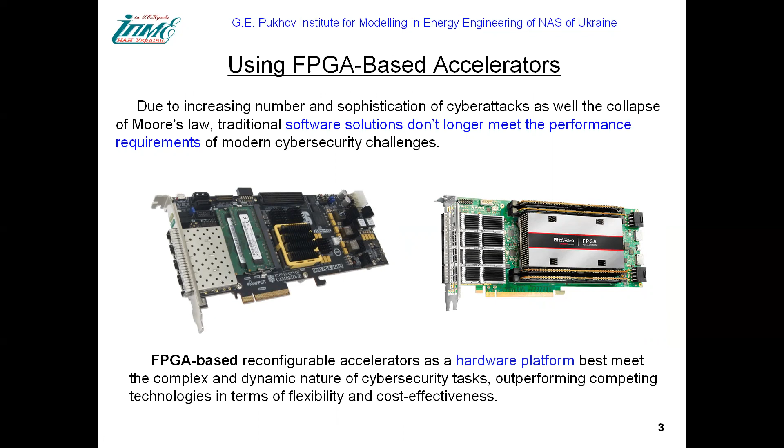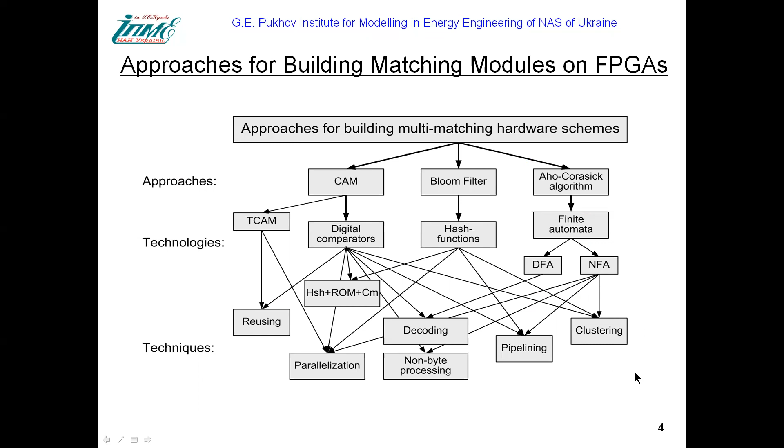There are a huge number of technical solutions to build hardware matching schemes. A lot of approaches based on different technologies, modifications, techniques, tricks. It is not a trivial task to choose the optimal solution for certain conditions.

Earlier, in our previous work, a method for fast quantitative evaluation of technical characteristics of such systems and their components was proposed. It is based on the so-called estimation function and allows to predict hardware costs and performance of a given matching scheme and a given pattern set to be recognized.

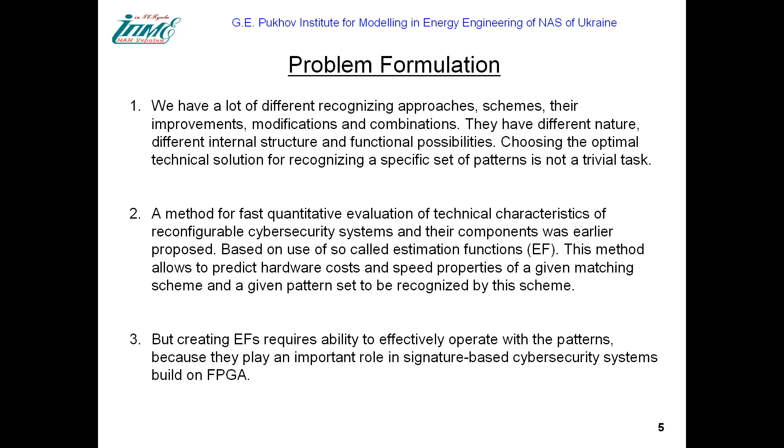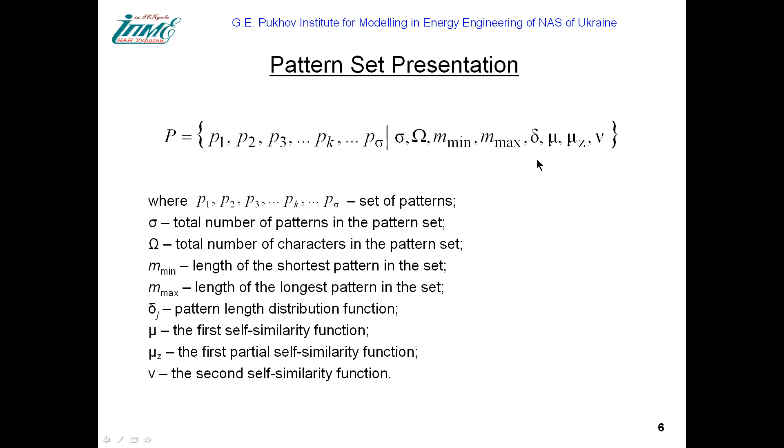When creating the estimation function, it is very important to be able to effectively handle the patterns. We propose to present the pattern set in such a way, namely a set of patterns and a set of their properties. The following pattern ordering technique is also proposed.

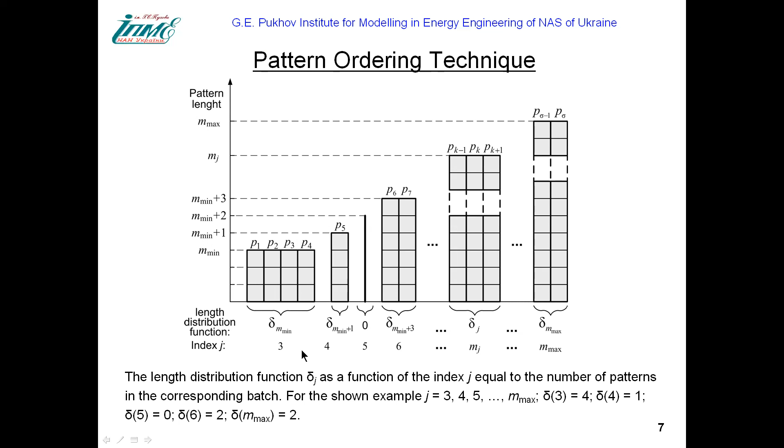Let us sort the patterns in a set by their length and distinguish groups or batches of patterns having the same length. Let us define the distribution function as the number of patterns in the corresponding batch. The proposed technique allows to easily find such values as the total number of characters in the pattern set, the total number of batches,

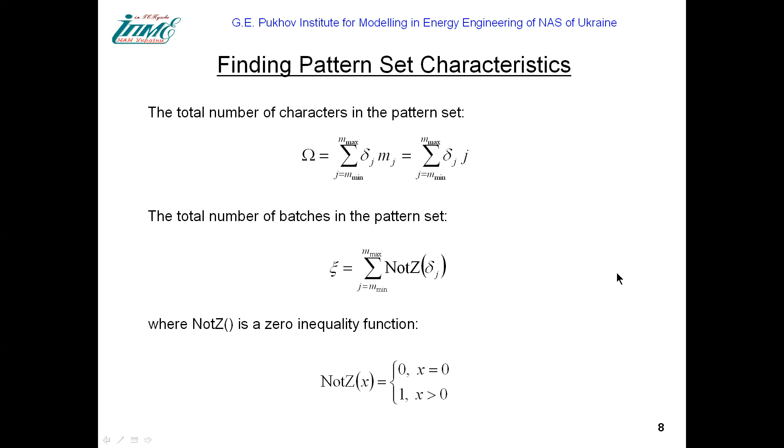and so on. Let us consider the estimation function for the hardware costs of the basic CAM, basic content addressable memory scheme. As we can see, this expression depends on the given pattern set P, as well as on the properties of the FPGA

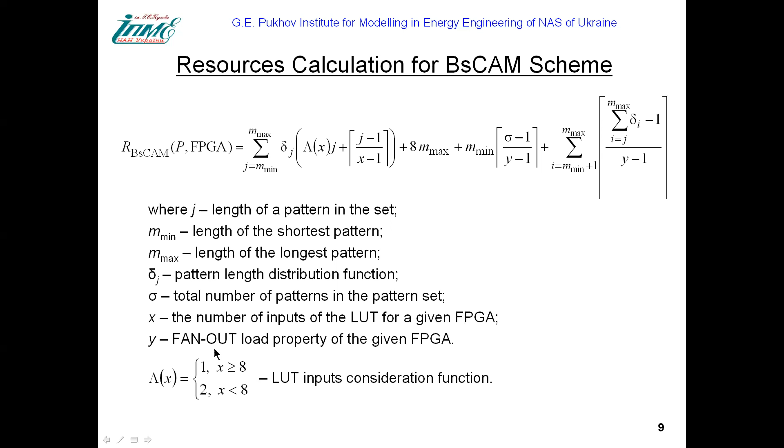device given. The pattern set properties are the length of the shortest pattern, the length of the longest pattern, pattern length distribution function, total number of patterns. The FPGA properties are the number of inputs of the LUT for a given FPGA and the fan-out load property of the given FPGA.

Let us test the proposed pattern set formalization with help of the parallel combining method. The essence of this method is to join together several different matching schemes and distribute the pattern set to be recognized between them in order to maximize the advantages of every matching approach.

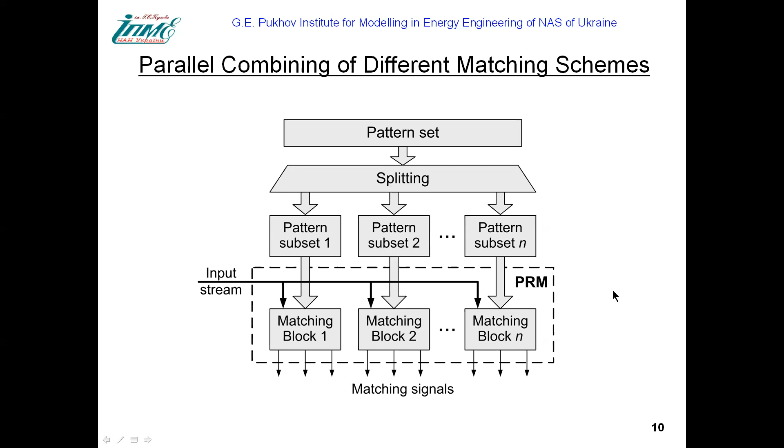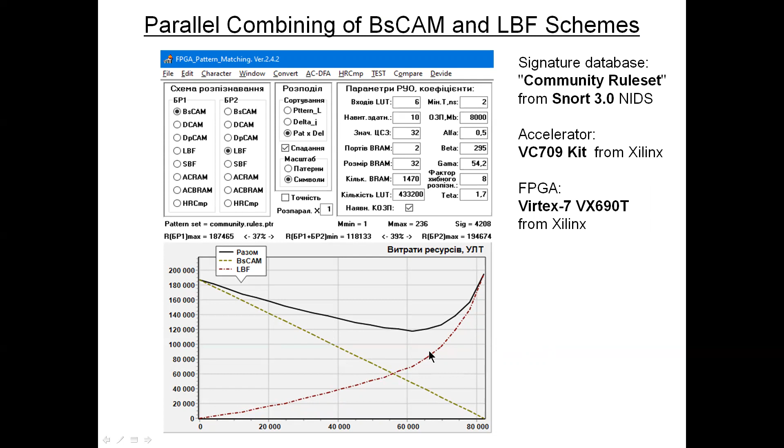Unfortunately, we observe such a nice picture not every time. More frequently, one of the matching blocks always, for any pattern distribution, shows better results compared with the entire module that consists of both schemes. How can we predict if the parallel combining gives a positive effect or not?

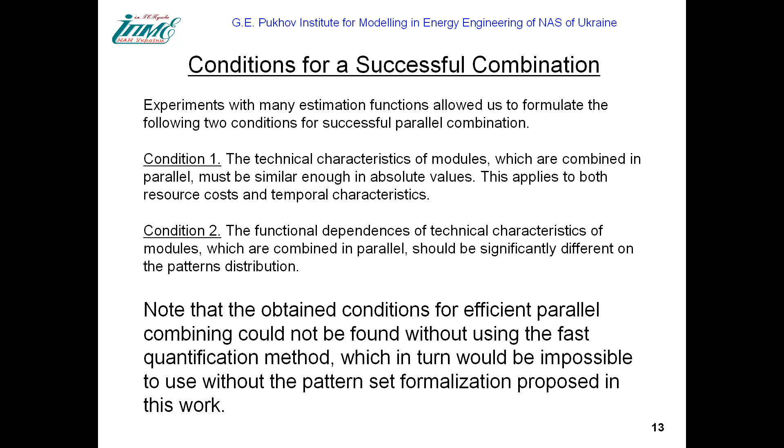A lot of experiments were conducted to determine the following two conditions of successful parallel combining. It is worth noting that the obtained conditions could not be found without using the fast quantification method, which in turn would be impossible to use without the pattern set formalization proposed in this work.